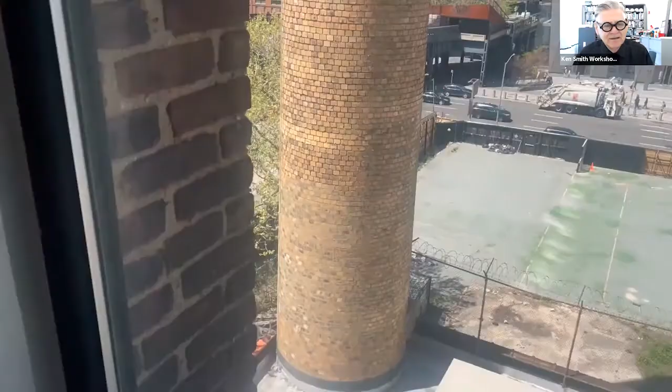It's just a short tour of the office. These are my test plots. I grow oak trees from acorns.

And we have a fairly spacious office, a lot of good light, a nice ceiling height. And it's a real workshop. There's a space to make stuff as well as to do computer work that we do mostly today.

So I'm going to show a very short video and then we'll proceed to show some projects.

Hi, I'm Ken Smith, a landscape architect by training, urbanist and artist by practice. And my practice is based in New York City and my work is mostly urban. In my practice, I pay attention to the history of urbanism and landscape architecture and the lessons of precedent. But more importantly, I explore the contemporary culture we live in today and the challenges, needs, and possibilities for moving the design practice forward. Over the course of my career, I have worked on a wide variety of projects, which has allowed me to address each site, program, and client as an individual inquiry, opportunity, and learning experience.

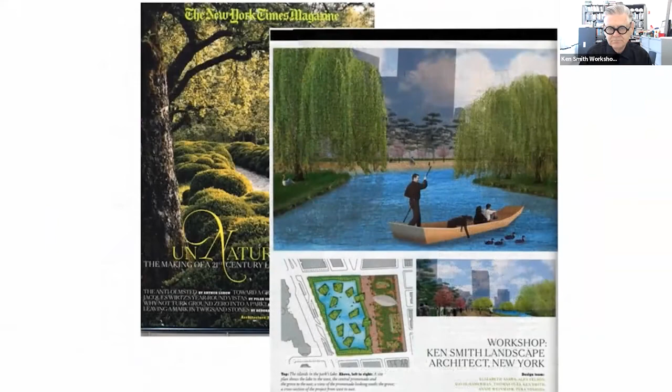The overall arc of my career, starting with early projects that were mostly small and art-oriented, has allowed me to focus on developing the medium of my craft, the way I make landscapes and how I think about them. As my practice has developed more recently, I've had opportunity to work on larger and more complex projects. I always try to work at multiple scales simultaneously. I have a saying I often remind myself to consider, which is, think big, think little, but skip the middle.

So what do I mean by that? First, I think it is important to think big, design conceptually with the strongest ideas possible in determining the formal structure, organization, and systems of any landscape design. But equally important is rigorously thinking through the details, the granular qualities. Is it well executed? Is it palpable and tactile to people? And most importantly, are the details and the concept in alignment?

And finally, my recent projects, especially the ones of larger scale, are more complex. They're often infrastructure in nature and have greater impact on public space than my earlier projects. I like to think of my current work as being art in the service of social purpose and environmental needs. From my perspective, landscapes have moved beyond the simple garden or anodyne green space. Today's designed landscapes are by necessity multi-purpose spaces and systems that are essential for creating and maintaining healthy urban environments and meaningful places for human life and culture. Thank you.

So I'm going to show 3 projects today that are dealing with waterfronts that I've been working on over the past decade or so. Okay, here we go.

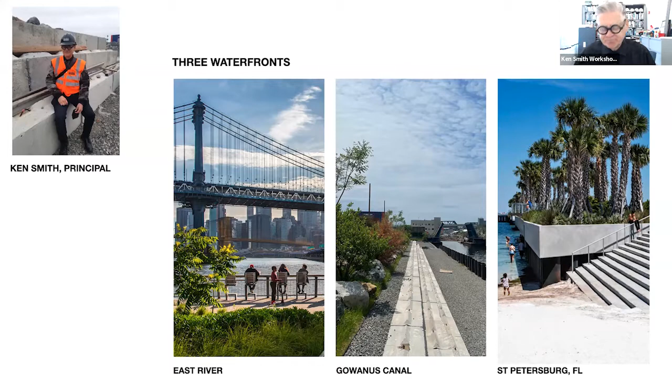So the first project is on the East River waterfront, and it's a project that is really about the persistence of an idea and carrying an idea forward from a project, even if the project doesn't succeed, which is the case here. I was working on ferry sites on the East River, working with Kennedy and Violich, architects from Boston.

Most of the waterfront in Manhattan is defined by a seawall, which you see here. And this was the site of one of our project sites. And the ecology of the river has been reduced to a 6-foot scum line for most of the island of Manhattan, which is really quite sad and unfortunate.

But in this image, looking at in the background, there was an old abandoned pile that had soil and a plant community that had blown in and established itself. And I thought that was actually quite interesting and quite beautiful. And that became the inspiration for this project.

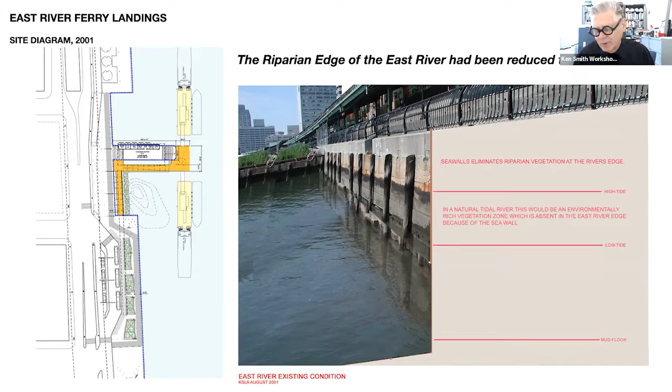And the idea was to create an environment for a natural marshland. Part of the problem was that the walling of the city, the seawall, causes the flows to increase on the river. And it's very hard to establish plants because the power of the water moving quickly will rip the plants out. So the proposition was to create a series of planter boxes which would protect the plants from scouring, but also allow them to thrive and create a much richer liminal edge.

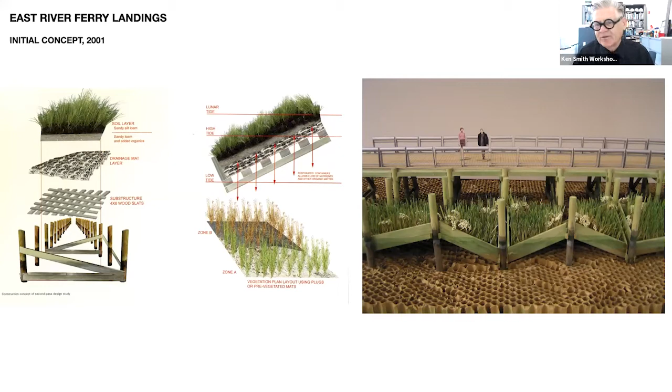So this is an early study. And then this is the final design that was taken all the way through construction documents. But unfortunately, we were never able to get the environmental approvals in place for the project. So this project never happened.

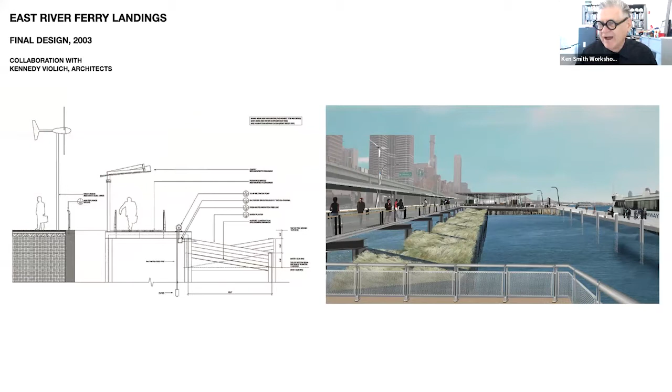But a couple years later, I was working on the East River waterfront esplanade with SHoP Architects. And we were working on Pier 35, and where it says Eco Park, that was a part of the pier that had collapsed. And rather than simply rebuilding the pier as it had been previously, the city wanted to do a prototype ecological installation that dealt with the tidal flows of the East River.

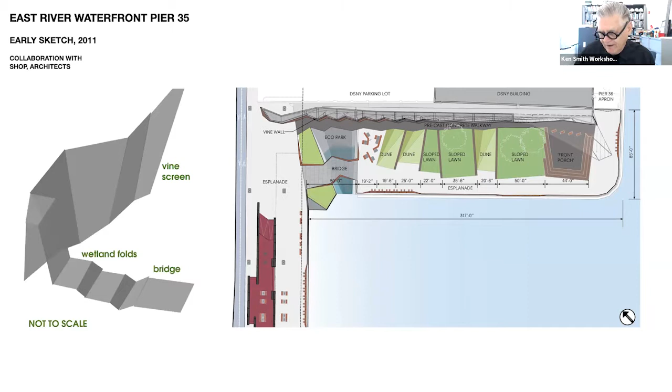And these were some early study models we did for creating a sloped and tilted terrain that would actually register incoming and outgoing tides and provide habitat for mussels.

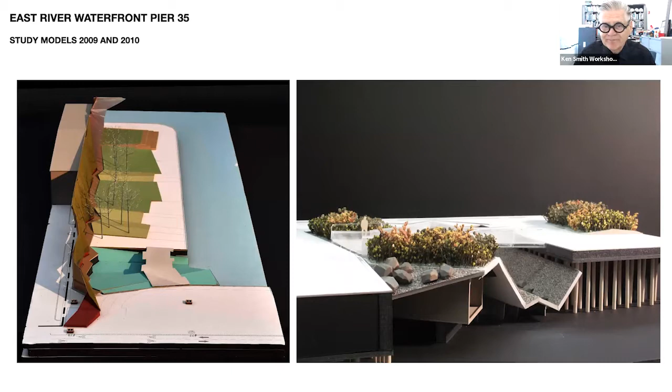So this is the larger project, mostly finished in the picture on the left, adjacent to the FDR highway. And on the right, you can see the habitat we created, which we call Mussel Beach.

And it's both an ecological resource, but it's also a social resource because it serves as the entryway from the esplanade into the pier itself. So there's a real human and ecological interaction that happens when people come into the park.

Here you can see the view of this is pretty much at low tide, and you get a sense of the other social spaces that are embedded in the park for nearby residents. And it's really one of the few places in New York City where you can actually see and register tide coming in and coming out. If you spend even as little as 20 or 30 minutes, you can actually see the tide change, which is actually quite remarkable. Since we live in a city surrounded by water, most of us are actually completely cut off from it.

This is a view of the green topiary wall that is part of the project that screens the adjacent sanitation plant. Some of the social infrastructure of social seating in the plantings, and the porch swings. At the far end of the pier, there's an elevated deck, a front porch, if you will, for the neighborhood, where you can come out and watch the life of the river with ferries and boats and life moving by.

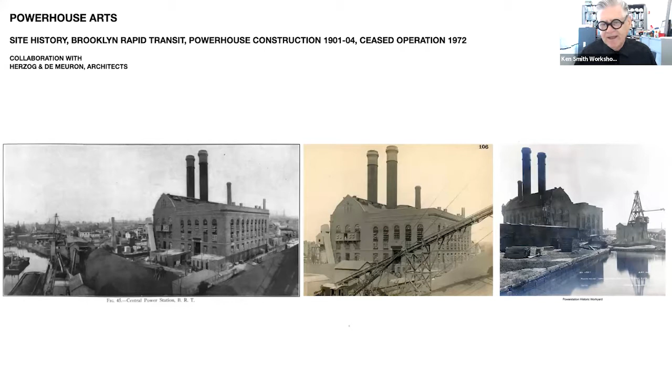It was built in the early 20th century, and the site was on the canal, and barges came in with barge loads of coal, which was piled up on the land, and a source of much of the pollution that has been remediated over the last several years. And this project is being converted into a cultural resource, which I'll describe.

Hi, I'm at the powerhouse. It's on the Gowanus Canal, which is behind me. And it's part of a district that's changing rapidly from old manufacturing and industrial uses to higher density uses of commercial, mixed use, residential, and cultural facilities.

So the building itself, half of it was torn down in the 60s or 70s. The other half that remained is really quite derelict when we started the project in 2017. This is a project where I'm working with Herzog and de Meuron as the project architects, and the project is to convert this into an artist manufacturing space, to create studios for artists to learn manufacturing arts. It speaks to the maker history of Brooklyn, where the city actually made things, had real industrial production. So this facility will be a cultural facility dedicated to that kind of production within our city.

Herzog and de Meuron began this project after an early selection process, and we were instantly inspired, not just by the existing conditions of the building, but also by the fact that it was such a unique, intact original industrial site. Landscape was critical to this project because there was such a large, generous site involved. It was also about maintaining open space, and working closely with Ken from the very beginning to let the architecture and landscape disciplines talk to each other.

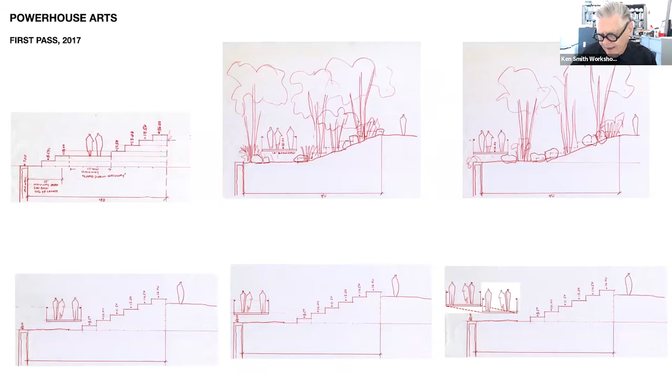These are some early studies looking at how to organize the space of the 40-foot width of this waterfront edge, providing public access and a toehold for a new kind of nature. This was the image created to give a sense of the character we were aspiring to create along this waterfront edge.

Simultaneously, the team went out to look at recent infrastructure work happening along the canal and the waterfront. I think these sheet pile walls really appealed to us because they have real girth to them—they're honest, they're direct, they're functional, and they're actually really beautiful, even if underappreciated.

We also saw these at the concrete yards—big concrete blocks used for retaining, which also have a kind of honesty that was very appealing. There were piles of boulders used for reinforcing slopes that had a beauty to them, and the crushed gravel was really integral to the place. So these four materials became our palette for creating the landscape.

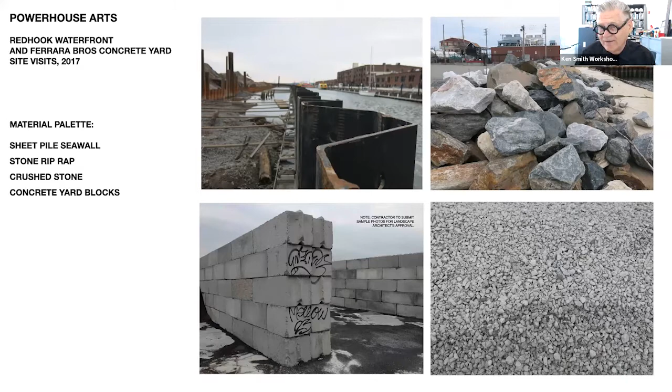During construction—mainly the last half of this past year—I was on site once or twice or three times a week to make sure things were installed correctly. Even though these are humble, tough materials, there was a rigor to their placement and organization that was very purposeful, very thoughtful.

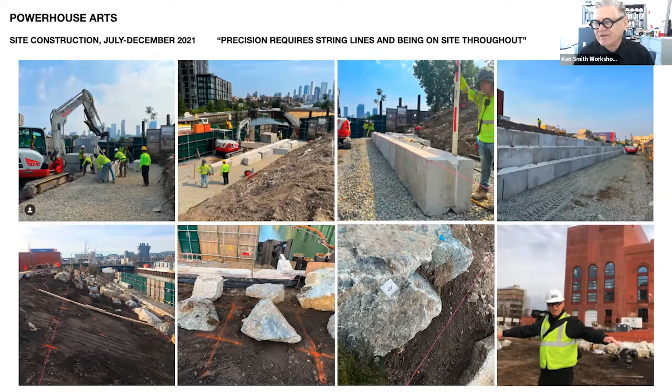And it's really, I'd say, the interaction between the rugged material and the precision of their installation that kind of really gives it some power.

And then these are some projects, some of the views when it's nearly construction finished. This is last January, I think. And this is the stepped wall, the seating wall made out of the concrete blocks. This is really designed to blunt the force of a flood surge, because we know that during big storm

events, we're going to have flood surges, and this protects the toe of the slope from erosion. And then the slope continues to raise the site up to a much higher datum, and then the boulders help reinforce that slope as well.

And one of the things that we did here is that I designed this so that everything sits perpendicular to the slope. We created the slope, and then the boulders just sit on the slope. And the plantings are all planted perpendicular to the slope.

And I did that intentionally because I want these plants to achieve a kind of rugged form. So planting them, if you will, at an angle means that they're never going to develop into perfectly symmetrical, generically normal plants. They're always going to have a distinct character that's wild. I think that's going to be really quite beautiful as it grows in.

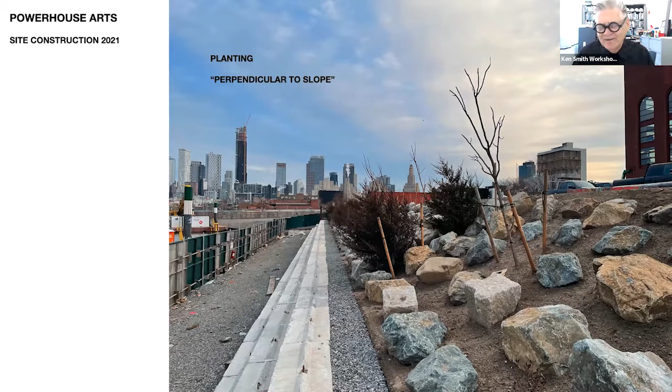Also, it contributes to a feeling that somehow this whole landscape could be in some way sliding toward the canal. This is another view of that slope and the sense that it's sliding toward the canal. And you can see here that the sheet pile has been installed.

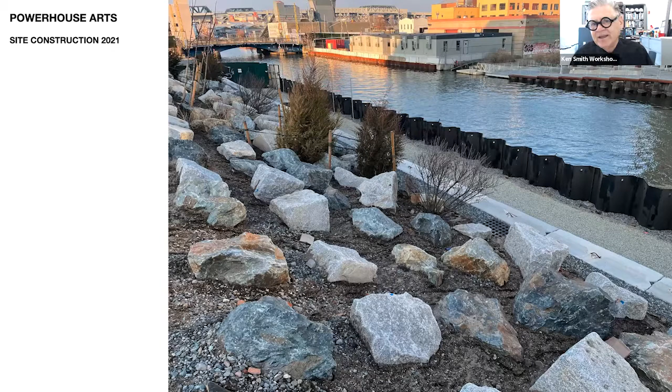Another view, the meadow grasses are now starting to grow in between the boulders, and it's starting to green up substantially. And you can see the relationship of the slope to the stepped wall, to the gravel esplanade that people can occupy, and the

seawall parapet. And what we did intentionally was we didn't want to have an ornamental railing. We actually saved money by just leaving the sheet piles 42 inches above finished grade, so that for no cost, we got a free parapet wall that is really very distinctive and very much part of the heritage of this area. And it's really got a beautiful set of bays that are very occupiable and quite comfortable and lovely.

And I would point out in the background is Susannah Drake's Sponge Park, which is one of the very first environmental projects on the Gowanus Canal, and really a terrific project.

So the third project I'll show is in St. Pete, Florida. It's a project that I worked very closely with Rob Rogers on, who I've worked with on a number of projects, starting out with 55 Water Street, the elevated acre, back in 2003.

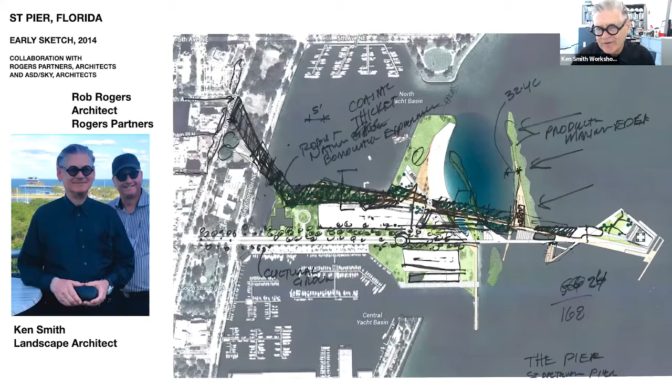And Rob and I worked very well together. We worked very closely. We were good collaborators. And this was a competition that our team won.

And there was an old pier there, which you see on the left, which was basically a 2-lane street that was almost a half-mile long out to a platform with an iconic restaurant and building on it.

And when you went there and tried to walk out to there, it was just brutal, especially in a Florida summer. It was just a really unforgiving environment.

It really had been designed for people to drive out, park the car, go to the restaurant, and drive back to the city. Our idea was that it should not be for automobiles. It should be for people and bicycles.

And so we designed a pier that took the experience and stretched it all the way from the city, all the way out to the end, and made a series of iconic spaces all along the length to program it for activity. And so these are some early diagrams showing program and activity loops and looking at how it would

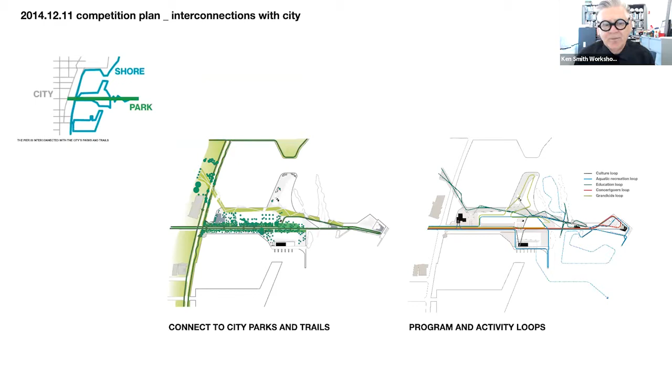connect to the city parks and to the city itself. And the landscape was really organized along two central ideas.

In pink, you see what we call the cultural grove, and it's really taking sort of cultural landscape from the city and pulling it out toward the water. And this stretch includes the farmers market and cultural facilities like that, children's playgrounds and things that were designed by Barbara Wilks. And then the green part that meanders through is the coastal thicket, which is an abstraction of the

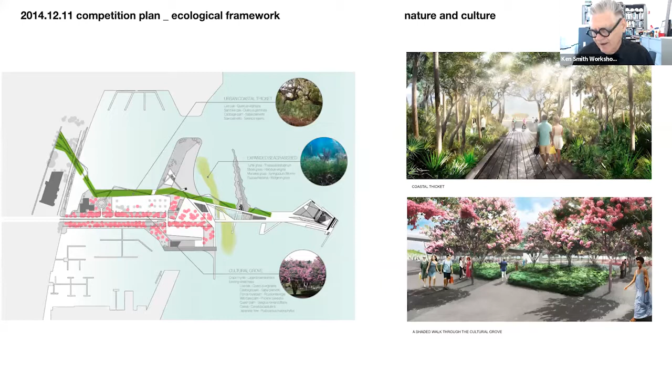mangroves that you find in Florida. And this is the final design plan. The area on the right of the dash line is the part of the project that our team was responsible for. And on the left was the part that W Architecture, Barbara Wilks, was responsible for.

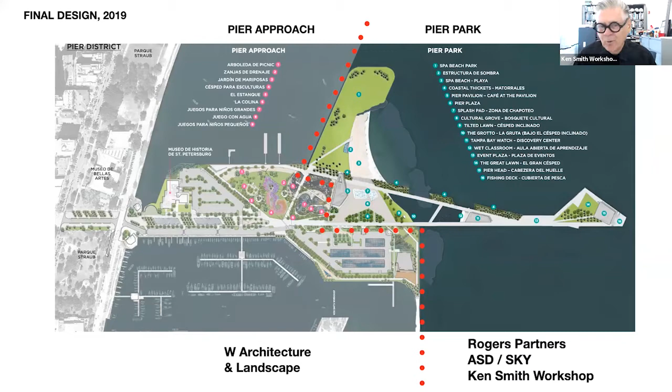And then the modeling that was done during design. One of the things that we did is we preserved some of the old piles that occur on 20-foot on center spacing.

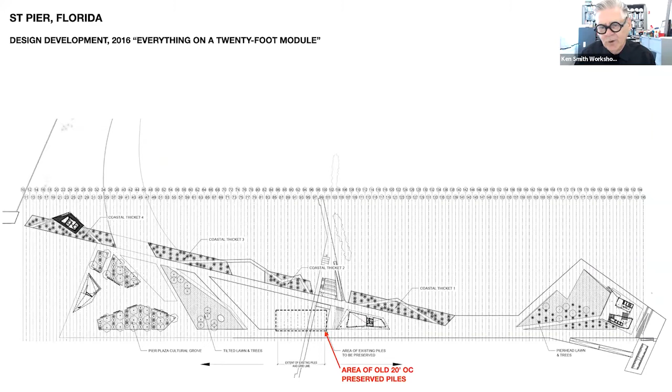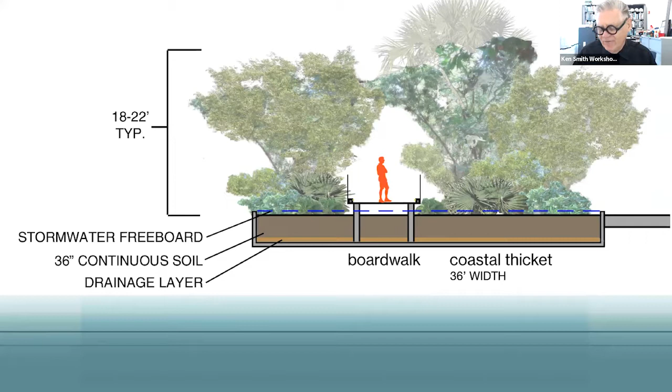We used that spacing to provide an ordering device along the pier as we developed it. The coastal thicket sits over structure, floating over the water. It's got substantial width and depth, so it has real cubic footage of soil that can support robust plant life. This is the completed project with the plaza and fountain in the foreground, the coastal thicket, the environmental center in the center, and then the pavilion on the end for special events.

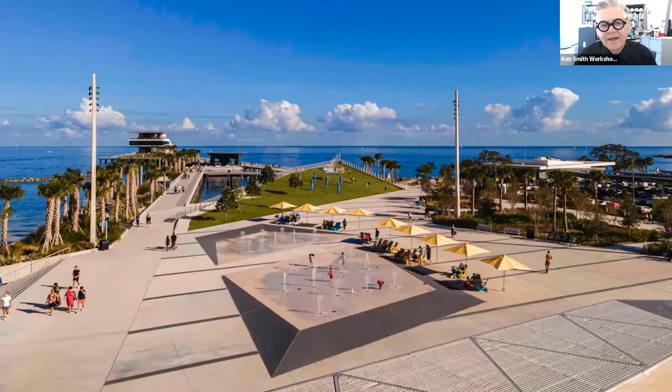Another view showing the relationship between the new pier and the historic Spa Beach, which is a natural beach. You can see the coastal thicket in the foreground. This is the plaza with the water feature that is both a civic fountain and a child's water spray. There's also a tilted lawn in back. Florida, as you know, is really flat, so this is St. Pete's new hill, which people really love.

And there's the coastal thicket, seeing how it hangs out over the water. And the boardwalks, which give a different kind of experience and provide some shade for that walk out to or from the end of the pier. You can see some of the old piles floating in the middle ground there. And the view of how it ties into the city.

So with that, I'd like to invite Hardy Stecker, Senior Associate in my office, to take over and describe a little bit of our design process.

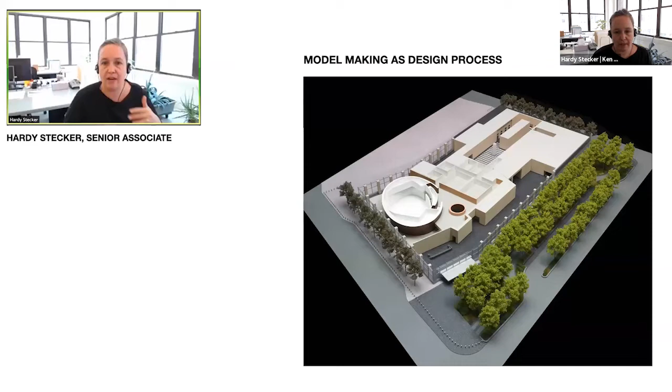Hi, my name is Hardy, as Ken introduced, and I just want to talk a little bit about the design process that we have through model making here at Ken Smith Workshop. This was an early project when I began in Lower Manhattan at West Street. While this presentation model was something we used to relay the public landscape to the client and its relationship to the building, the design process with model making really also spoke to this idea of not only physical models that were representational of the landscape.

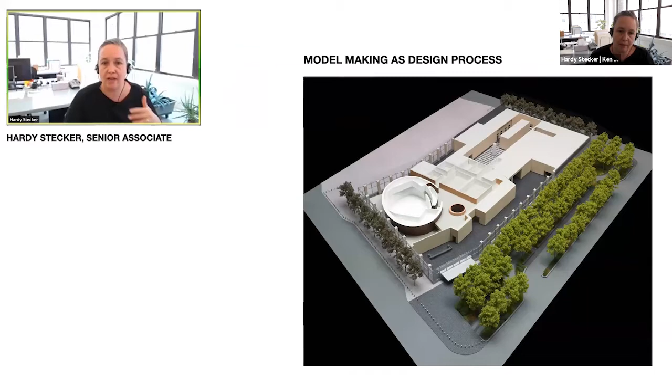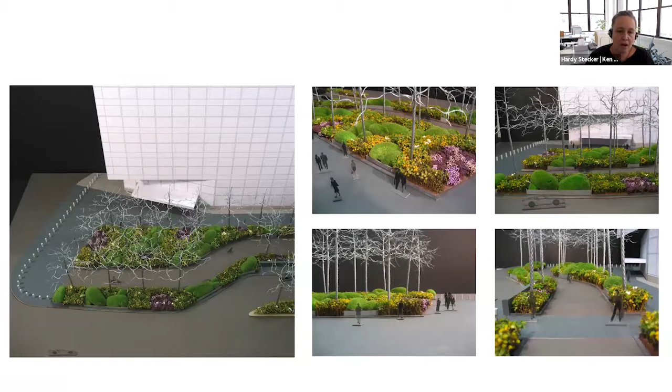In the next series of photos, this was a model that we were using to convey the materiality of the plants and the sculptural quality of these boxwood forms that we were creating, as well as understory gardens of perennials, ephemerals, and matrix plantings that we developed with Piet, and his artistic way of bringing a plant palette to this landscape. This model, which we used also as a presentation tool, not only to the client but to the Public Design Commission, really spoke to areas of public space, planting, bikeway, and road.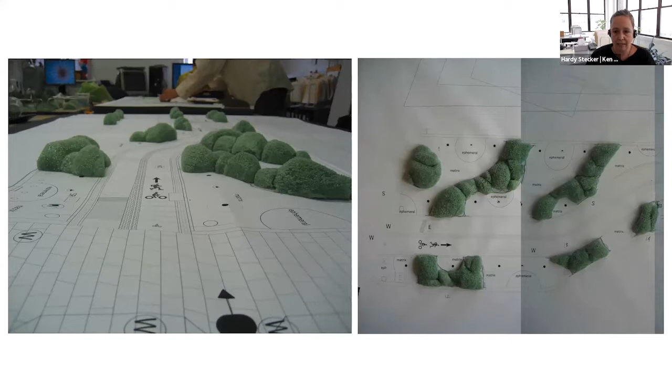It also became a really key design tool for us in terms of mapping out these boxwood that were sculptural and had differing heights, in two different species of boxwood. Ultimately they became the roadmap to create the construction document. So very much so, the design process in the office, model making, is dealing with three dimensions all the time, whether in a physical model or in Rhino, which we use now. Here, the built project really reflects the work that we did in the model to figure it out spatially. Thank you.

And now Feixiong Yu is going to talk a little bit about one of our international projects that we're working on in Bangalore, India.

Hi, my name is Feixiong Yu. I'm a project manager at Ken Smith Workshop. So this is one of our international projects, in Bangalore, India. As you can see, the site is a long rectangular site. It stretches 350 meters in one direction.

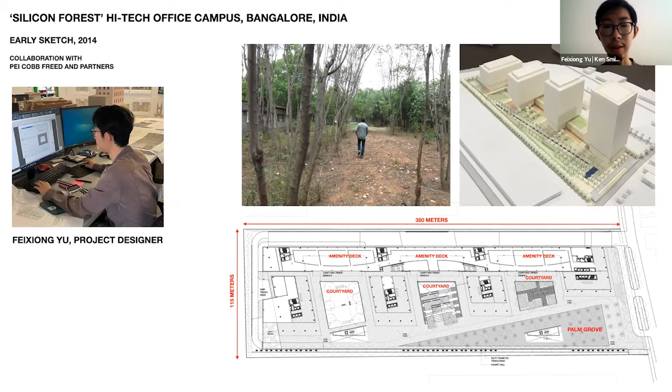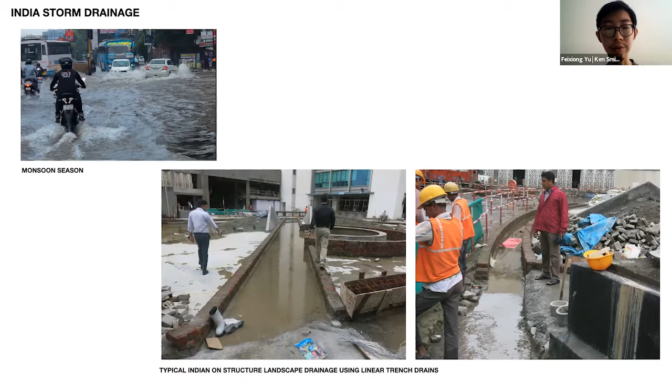So the next, this is our design, showing that we created a system that will conduct and then collect the stormwater to a reception tank.

So on the section you can see, there are a series of rainwater recharge pits that were collected throughout the site through some of the linear drains that we set up.

In the lower section, you can see the water, the watershed, falls based on the topography, going through sub drainage and then the surface drain, collecting at the surface drainage or trench drain, and then flowing back to the water harvest tank.

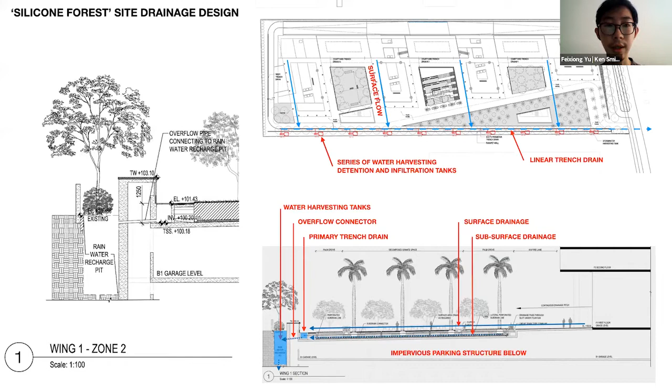And now Stephen Godanis will talk about something he worked on his first week in the office.

Thank you, Ken. Greetings, everybody. My name is Stephen Godanis. I'm a project designer here at Ken Smith. I'm joined by... Hi, I'm Steven Zimmerer. I'm an intern this summer. I'm pursuing my MArch, but I have a background in landscape architecture, and I was attracted to working at the workshop because of a shared sensibility between my approach and the interdisciplinary work of the office.

So when I first joined the workshop in January, the workshop was having a conversation with the Meatpacking District. Apparently people have been sitting on the planters that had been installed, so this gave us an opportunity to design seating.

On this screen you can see a good spread of our process, which starts with some initial sketches that get turned into drawings and various study drawings, and eventually turned into renderings in Rhino. But there comes a point where we need to make a physical model.

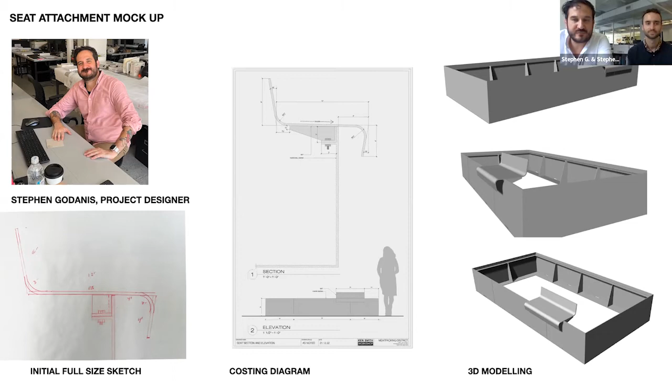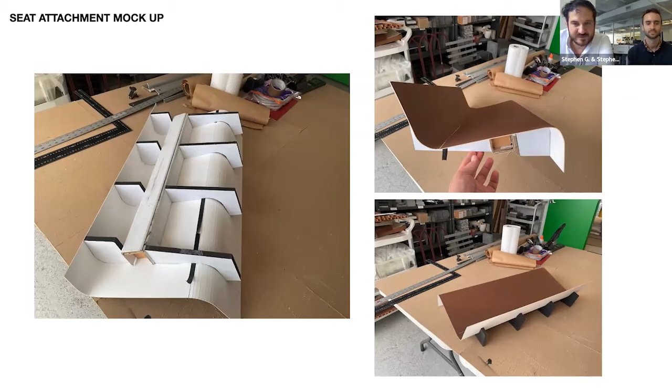This was a collaborative group effort that we all chipped in on. You could see we were working in the model space with the materials on hand, and then we ended up taking it to the site. I have to say this is an incredibly satisfying image.

It fits perfectly in, and it was really satisfying and helped us understand the project. And the client loved it. These will start being installed in their permanent fabricated form in about another week.

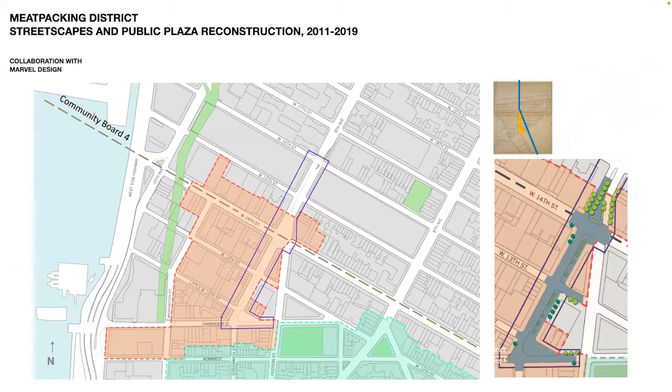Finally, I just want to give an update on the Meatpacking District before we move into our discussion. I've been working on the Meatpacking District for over 10 years now, starting with the reconstruction that occurred along with replacement of subgrade utilities, working with Marvel Design and URS AECOM.

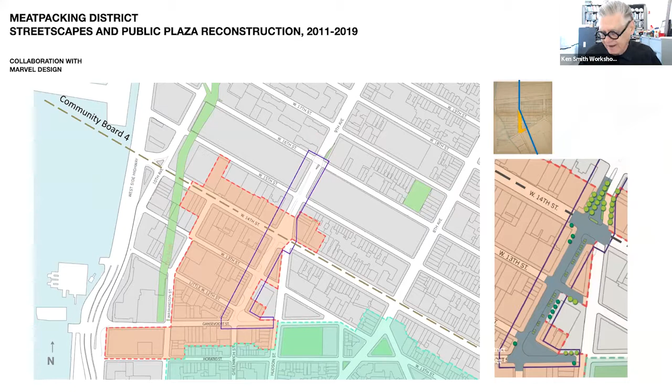The interesting thing was that the DOT, Department of Transportation, had determined that the street was overly wide. So the street was rebalanced, two lanes of traffic were removed, and we were able to create new, quite generous pedestrian plaza spaces as part of New York City's pedestrian plaza program.

But the part I'd like to describe now is the Open Streets program. Back in late March of 2020, during the lockdown, Jeffrey Lafrancois, the director of the BID, called me up and said we need to start working on the open streets so restaurants can move dining space outdoors so they can stay in business and survive financially.

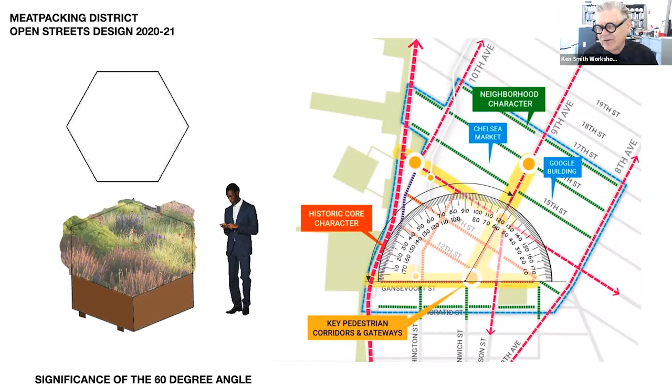So I went up to the site in early April. Jeffrey and I stood on opposite sides of the street and spoke to each other about what we wanted to do. I created an idea related to the context of the Manhattan grid, the orthogonal grid, where it meets the village's looser grid at Gansevoort Street, and this intersection of the 60-degree angle.

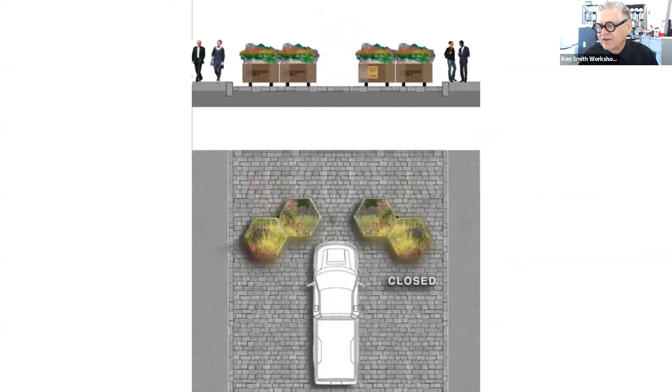So the proposal was to create a series of hexagonal planters. The notion was that they would be performative, that they could be opened and closed to either close off the street to traffic or open it when we needed service vehicles, fire vehicles, or public safety access.